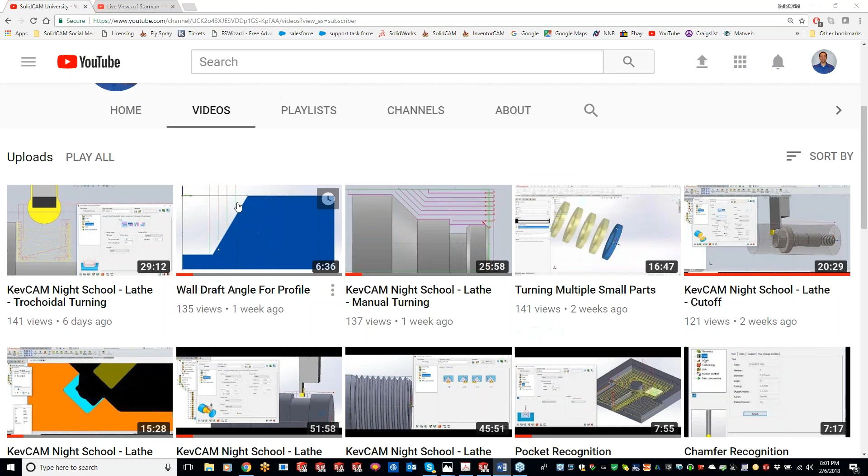So, completely off of SolidCAM subject, but I think we all kind of enjoy this kind of stuff - did anybody watch the live launch today for SpaceX?

I sure did. So Tim, how far are you from Kennedy Space Center? We're actually about, I think, 8 miles from the visitor center, but from the launch pad it's 15 miles from the house to the launch pad. Okay, and so we actually have Tim, Jennifer, Deneen, Sean - am I missing anybody in Florida? I think that's everybody that's in Florida. I think that's all of us. I think that's it, yep.

So Tim snagged this picture of the rocket going up. For those of you who don't know what I'm talking about, SpaceX did the largest payload launch, and they actually sent up Elon Musk's personal Tesla Roadster car. That was pretty cool. You can actually stream it, and this is what it looks like - the Tesla car going around the Earth. Pretty cool stuff.

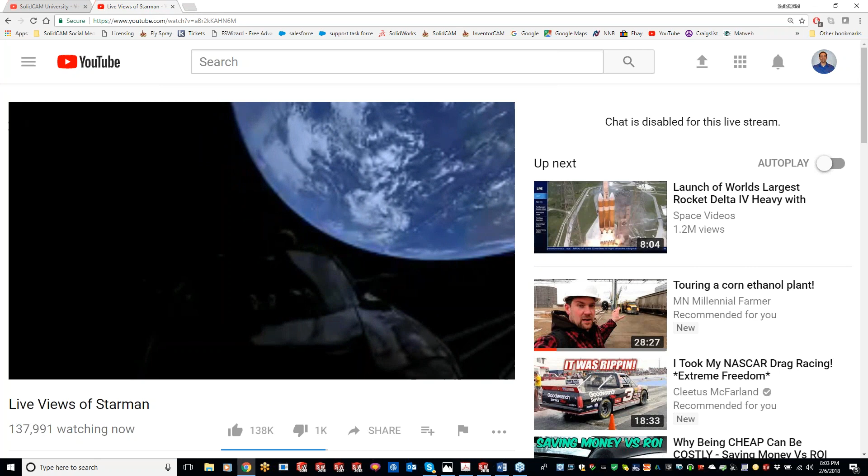George says, 'What a waste of a car!' But we were thinking, worst case scenario, if the rocket blew up, Tim Micah would have a new car sitting in his driveway. That's right, that's what I was shooting for. I was like, come on, let that thing blow up and land the car in my backyard. Oh well. Okay, sorry to get off subject, but that was kind of cool to see.

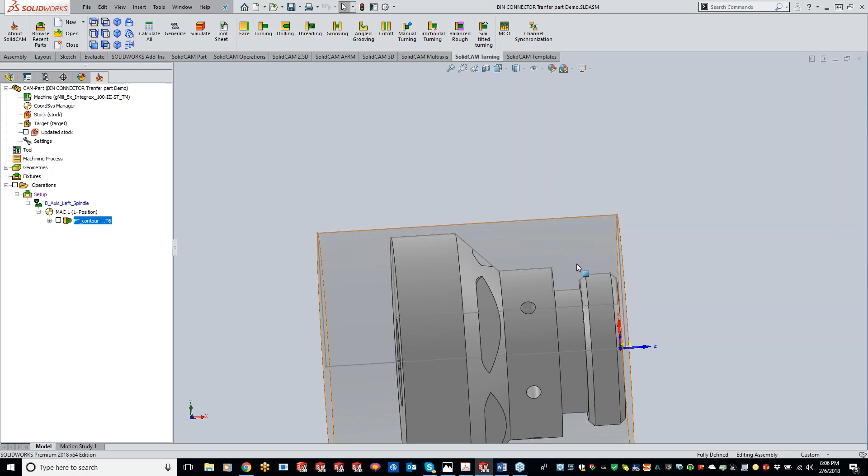So what we're doing is roughing from the upper turret and the lower turret at the exact same time. This is really going to cut down on cycle time for you guys that have a lot of roughing, or just have some extra material to do it on.

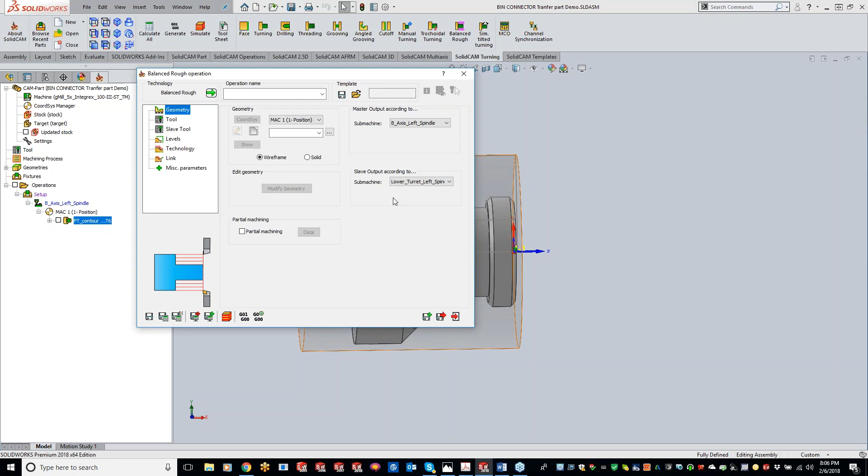So to start the process, it's very, very easy to do. This will be a little bit shorter of a class too, just because they've created this in a very easy way for you guys. So we'll do a balanced rough. Our geometry is the area that we want to cut, just like any other turning operation we've done.

So we'll say new, and I'll come here and start my chain there and end right here. So I'm going to rough out this entire area. Hit the green checkbox.

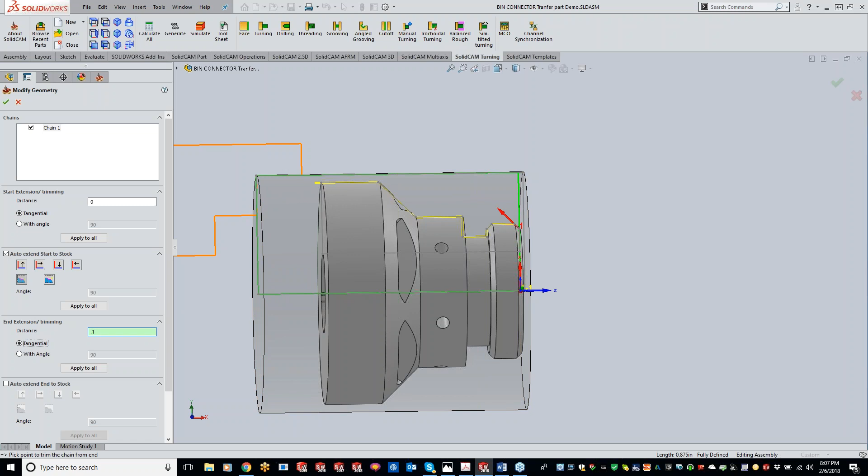Now, if I go to my Modify Geometry, obviously I don't want to do an auto extend to my end because I'm going to come into my vices here, but I'll just add an additional 100 thou in there, just so we go a little bit past. So you can see by adding that 100 thou, it's extended off my geometry line by 100 thou.

Okay, so this is pretty normal from what we're seeing. This over here is something new, not new to the software, but new for you guys that are seeing this. So basically, what turret do you want to be machining?

We have our sub machine right here, which is our master output, and I can come in here and click the drop down and pick what spindle I'm running on. So I've got my left spindle running with my turret and my lower turret running on the left spindle. For this particular machine, we can actually run on the right spindle also, just because this machine is able to do it.

So you've got your sub machine, or I should say your master, which is going to be your top, and you have your slave, which is going to be the bottom trailing behind it. A lot of times you won't even have to mess with this, because a lot of machines just have your upper turret and your lower turret, and that's the only turret you really have to worry about. But if you guys do have a sub spindle over on the right hand side, this is where you would go to change it.

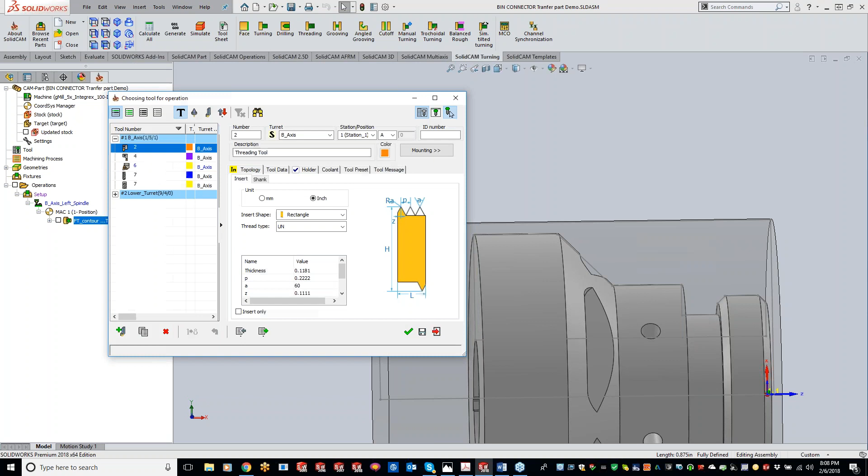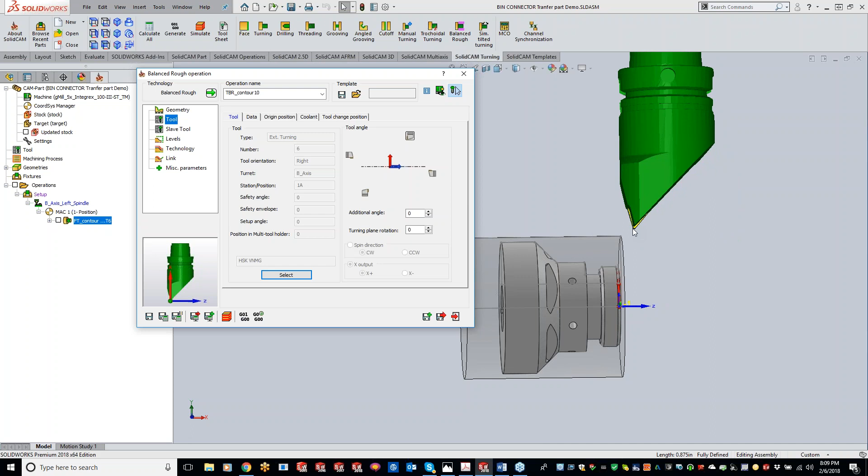Okay, so with your tool, what tool do you want to use for your main up on top? I am going to use my tool number 6. Hit the green checkbox and just rotate it around right here. Like I said, this is an Integrex machine, so this is actually mounted up on another spindle, and I'll show you guys what it kind of looks like in the machine sim. So we've got this mounted up in the spindle, just like picking any ordinary tool.

Now your slave tool, which is following behind, I'm going to grab my tool number 1 right here. Now here it gets just a hair tricky, because technically I'm oriented the wrong way - this tool should be flipped down here. But since we're doing the balance turning, you don't have to take that guesswork out of how it's going to look down there. It's going to rotate that tool automatically for you, flipping it to go the right direction for the bottom half. So don't worry about changing the mounting around - just get it so if you were to visualize machining with the upper turret. Hopefully that makes sense.

Levels, same as normal.

We'll just leave everything as default. Now, technology—how do we want to rough it?

Going forward, if we go to the roughing strategy to edge breaks, that's what you guys are normally going to see. The only added piece here is the balance mode. So we can do the upper turret and the lower turret cutting at the exact same time, or I can do a trailing, where the slave tool follows the main tool—for this instance it's 1 inch, but we could just do a 1/4 inch trailing behind. So it's totally up to you guys how you want to do this, but you do have the option to do it simultaneous.

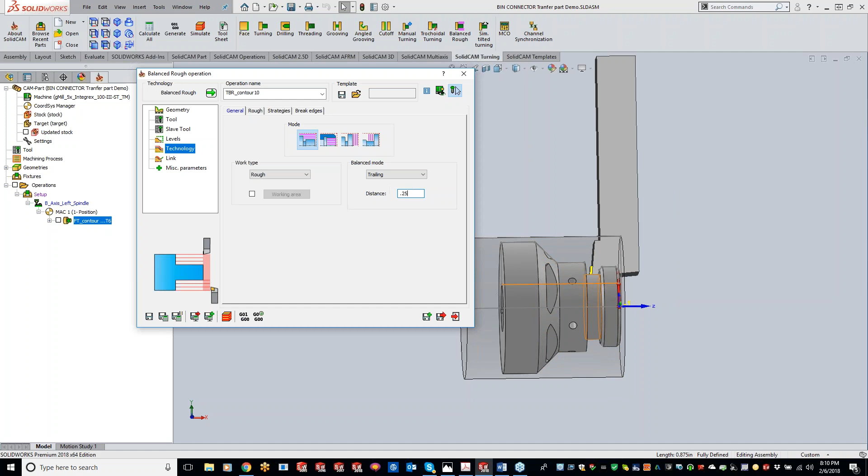So it's doing the upper and lower at the same time, at the same cut. Let's do save and calculate, and I'll show you what I mean, because when it's doing the balance roughing, they are going at the same time, but one is following just a little bit farther behind. I'm going to go to my strategies here and remove the non-descending motions.

Okay, let's take a peek and see what this looks like first. Let's do turning. So you can see right here, I got my main up here and my slave down here, and my slave is following that 250 thou behind—you can kind of see it's just keeping that constant distance going all the way behind.

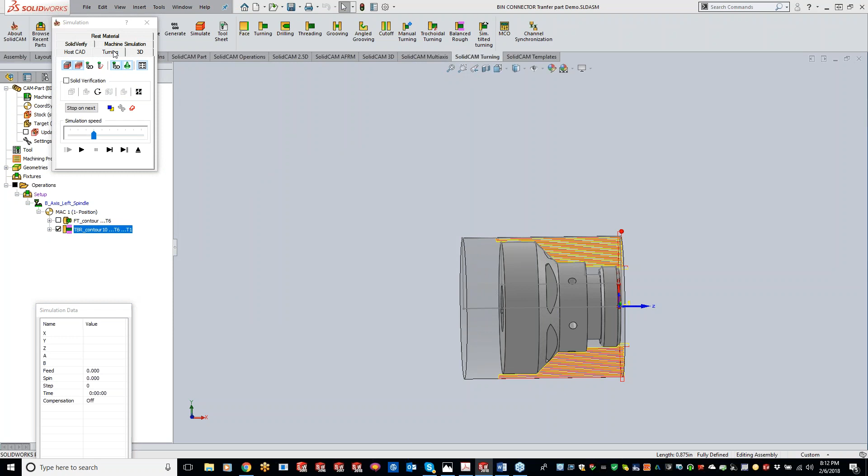Now, if we switch that over in my general tab here to simultaneous, they're going at the exact same rate. So that top one is still cutting deeper than the bottom one, but they're doing it at the exact same time. This one is just a little tougher to see because they're going exactly together. But it's definitely up to you guys on how you want to do it—if you want to do it at the exact same time.

But for simulation purposes, it's a lot easier to see if I do a trailing. Save and calculate—we can see better what's going on here. If you guys think of balance roughing as identical to turning, I'll show you an example of that, but there's not much complexity going on right now. The only difference is we're using that lower turret and cutting at the same time as that upper turret.

I know when we start working with balanced, using that upper turret and lower turret at the exact same time, it seems like it's going to be tough to program. It's not—they've simplified this and made it real easy. So think of this as just a standard turning operation, just with the added lower turret for you guys to do the trailing.

Under the rough, I don't—Kevin, do you have the options? Go ahead.

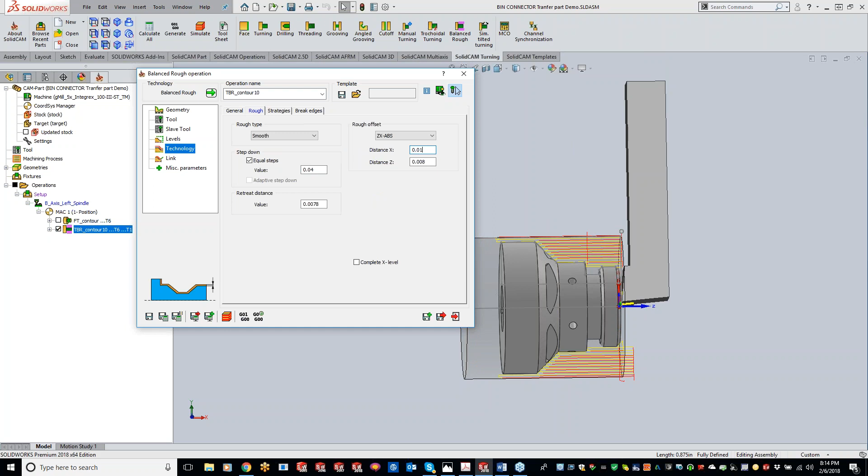So instead of doing, let's say, 10 cuts on your upper turret, this is going to reduce it down to 5 cuts, still taking that same step down of 40 thou that we specified. And we can leave a 10 thou finish on there—maybe I'll just put 8 to match it up here. So it just eliminates that cut time for you guys. Yeah, that's a better explanation than I gave. That's just another way to say it.

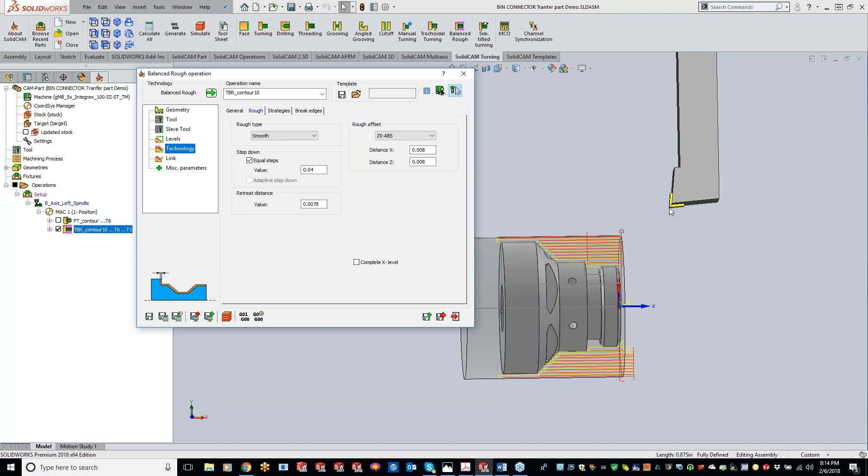We got a question there as far as facing capability. This looks like a longitudinal cut—I'm not saying the right word for the type of cut. Can you do this on facing as well? Yep, if we are doing a facing op, this will work also.

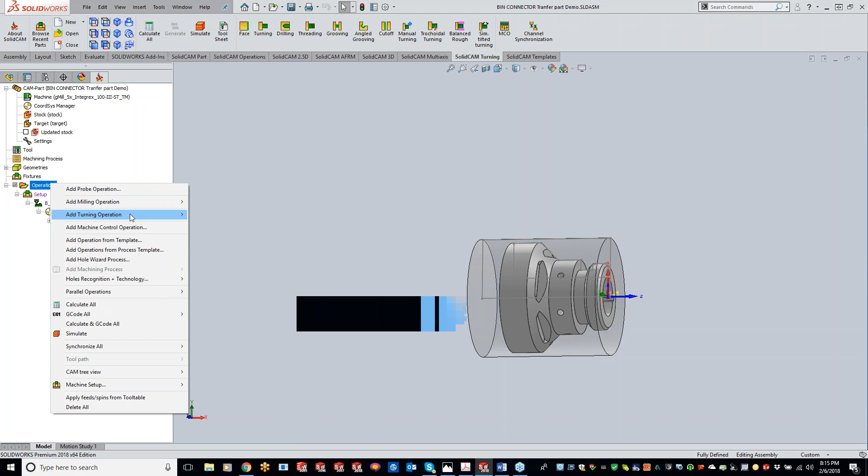Just to make sure I'm not eating my words, because I have done that in the past in class, let me remove that facing op. And we'll do our balanced turning, balance rough. Grab this guy here and do a modify. And we'll do auto extend. For some reason my auto extend is not coming up—let me get back in here, modify.

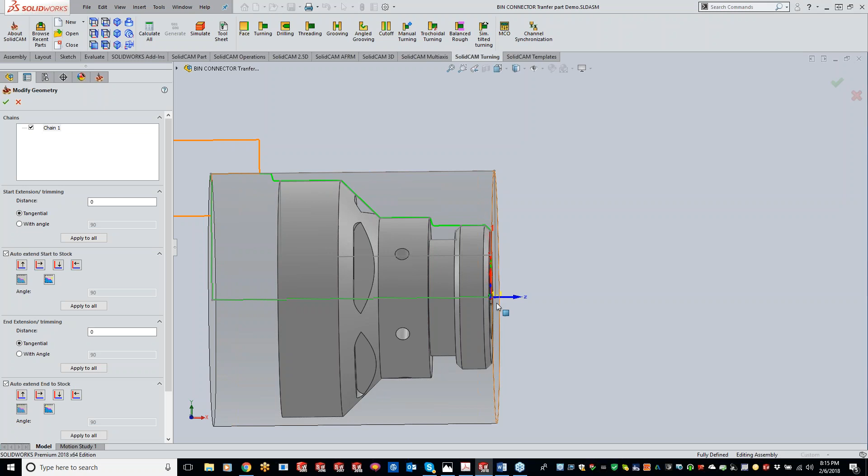Should be, maybe we can't do it on facing. Let me just try forcing it in here. So I'll do an auto extend to that point right there, and I will do a start extension up here.

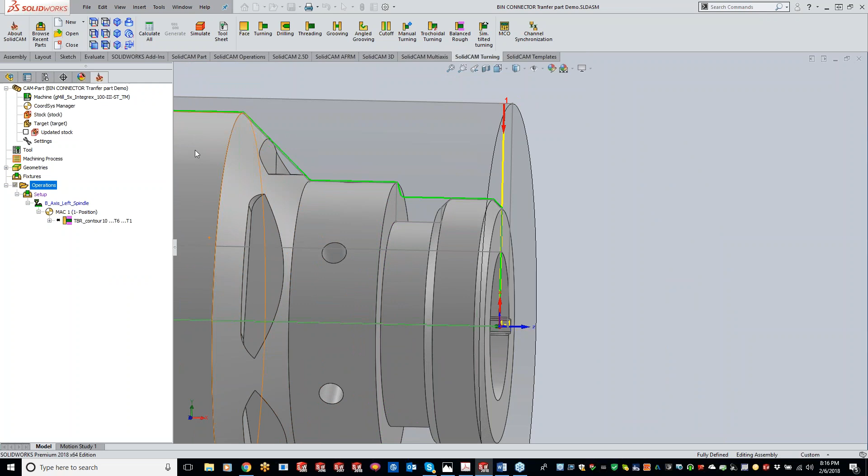Tool. So we'll use our tool number 6 as our main, flip this. Slave is tool number 1 on the lower turret. And let me save this.

I took these out of sync here, so I'm dragging that one down. All right, make sure I grab the right one here. Yep. Okay, now we've got our slave and we will do facing front.

And we will do trailing again of, let's just do 100 thou. Roughing strategy, let's just do some small passes. Not that small, 10 thou, 10 thou. Save and calculate.

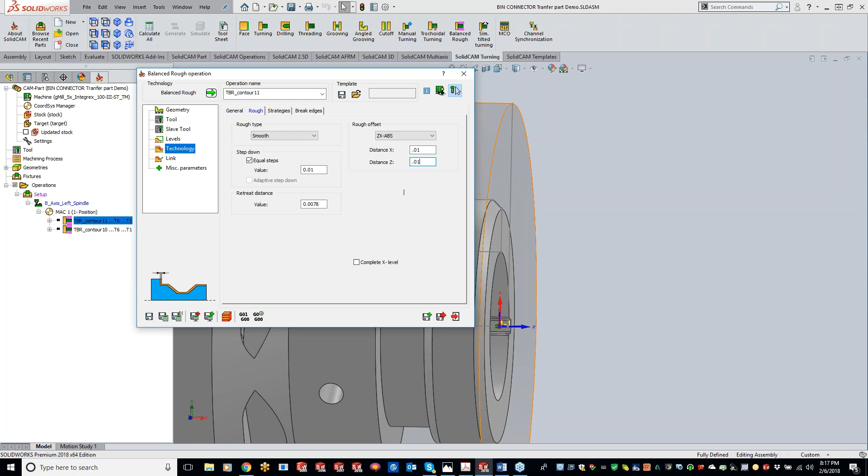I had a question there about tool number 6, whether it has clearance to do facing. It's like tool 6 might crash on you. Yeah, I don't have my tools oriented the right way. But to answer your question, was it Greg? No, Ben. To answer your question, yes. I don't have the clearances shown right there.

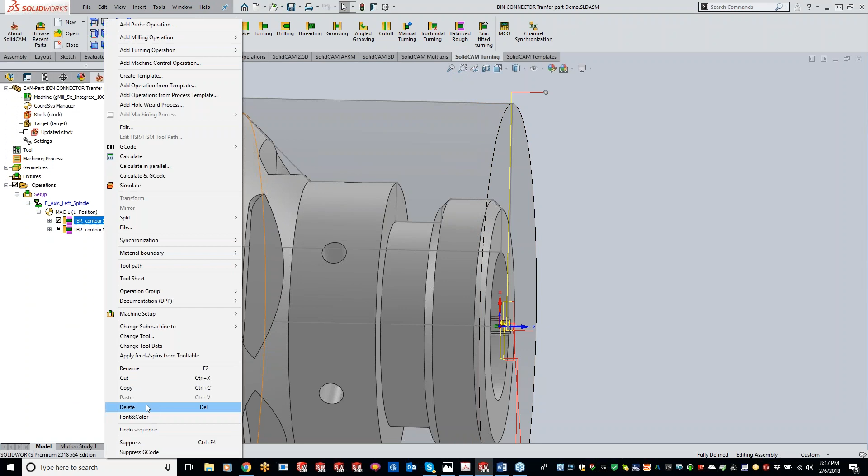Going back, Kevin, to Ben's question, wondering about balanced roughing for having the upper tool do the ID versus the OD, one tool running one and the other running the other, or does that have to be a separate operation? Okay, so that would be a separate operation.

So let's say that upper tool is doing a roughing and finishing up here, and the bottom turret is doing an internal bore right here. You guys can have that happen at the exact same time, and that's going to be part of your channel synchronization. I'm not going to go too much in detail here because this gets a little bit different per post processor.

Each post is set up just a little bit different on the channel synchronization. And what happens in the channel synchronization is I can have many different ops, and I'll show this once we get into some of the mill turn, but we can get going, you know, upper turret and lower turret, and we click the channel synchronization here.

What it's going to do is look at your program and tell you what tools can go along with each other. So you guys can actually be doing all this work up here and down here at the same time using the channel synchronization feature. It's going to tell you if it can be done, where it can be and where it can't be, and why.

Sometimes clearance. So if I'm doing a groove down here and I'm outside machining out here, we're going to be running into some additional stock down here depending on where this grooving is starting off for us.

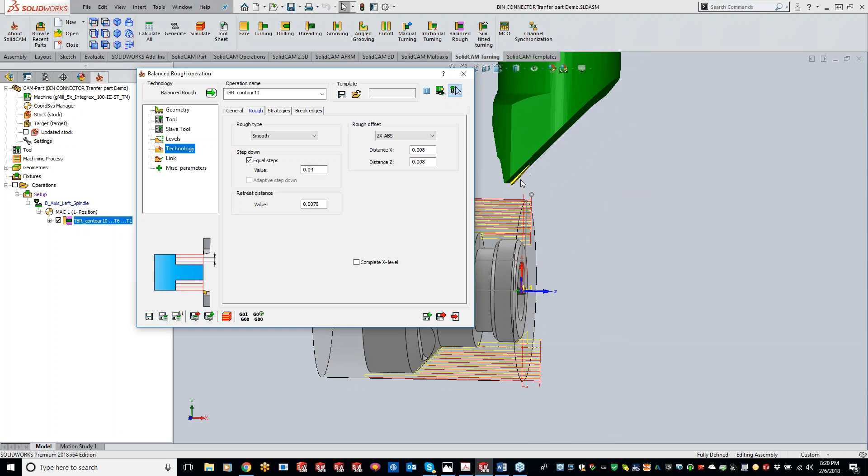It's really cool technology, and I'm kind of amazed, the more technology comes out, the more stuff we're able to do, just because we have to keep up with the machine vendors doing these machines. If you would have looked at this machine 10 years ago, I'd be like no way, that's not even possible. But as the machine vendors come out with new features, the CAM software is automatically adapting to that for you guys.

And Ben, I think that answers your question. As long as the machine's capable of doing it, for sure. Absolutely. Yep, so definitely can do that for you guys, and the sky's the limit. I'll kind of show, when we get into the mill turn basics and advanced mill turn, really how powerful the software is.

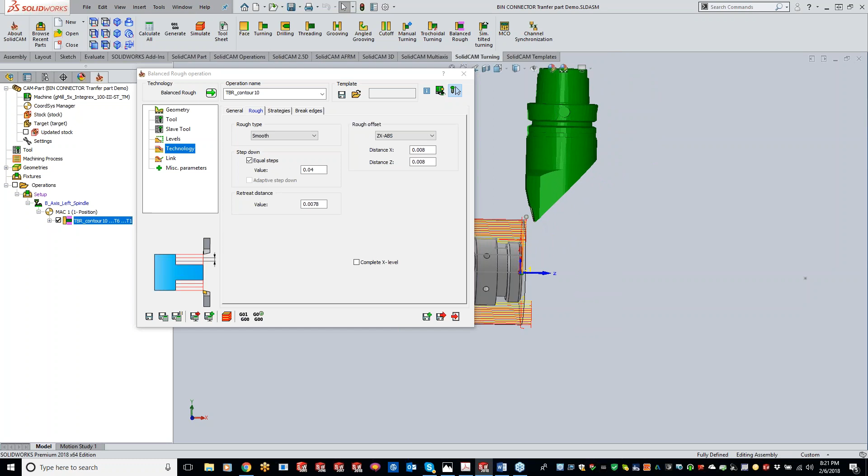Okay, any questions on the balance? Let me go through one other thing here. I don't see anything else. So the balanced roughing, hence the name roughing, we still have that 8 thou on here to come back with a finish tool. Well, they've made things quite easy for us.

So what we can do is we can just do a save and copy.

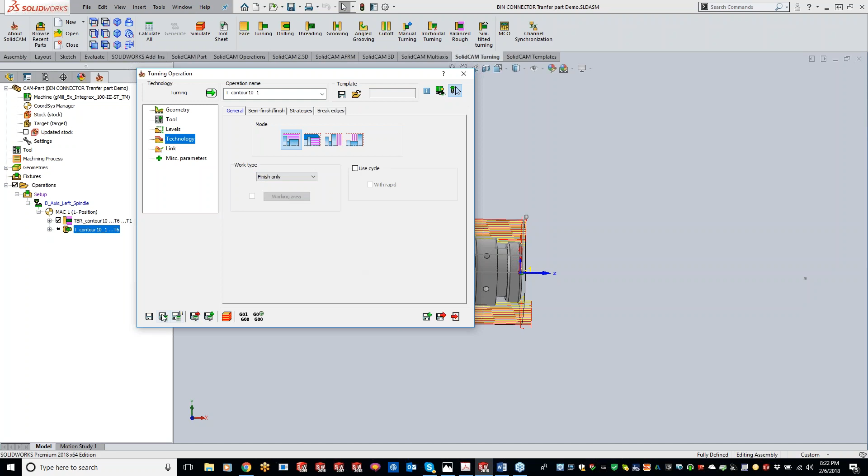And now the only thing I have to do is hit this little arrow right here. By clicking that, it's automatically going to convert it into just a turning operation for us, but I still have all my parameters. So the only thing I really need to do in here is go to general and tell it to do a finishing only, save and calculate.

Now I've done a finish pass, cleaning up what I had left over. So if we do a simulate here, turning, you can see going through there. So let's play these both together.

And some of you might be saying, well, why isn't the holder showing up? That is an STL holder that's only going to show up for you guys in SolidVerify, Host CAD, and MachineSim. So on the turning one, the STL holder will not show up, it'll just be the insert for you.

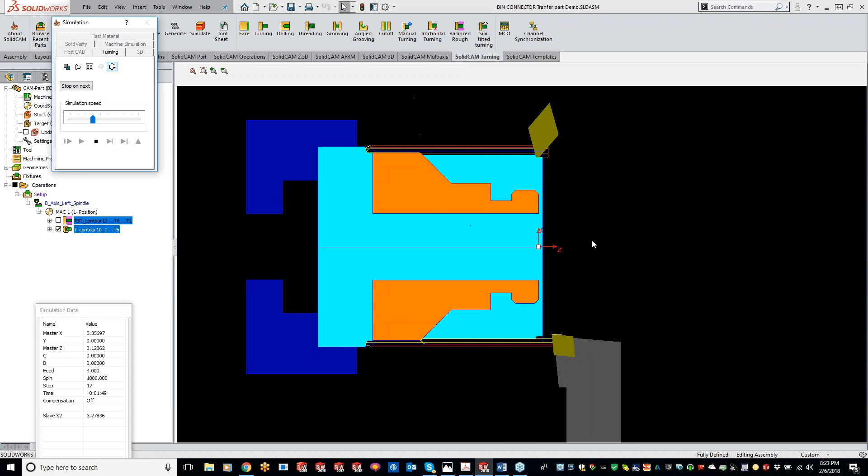So let me hit the play button here. It's just so beautiful, isn't it? All right, now it's going to do the finish pass, and we're done.

So let's take a peek and see what it looks like in MachineSim for you guys, to get a little bit better view of it. Now this MachineSim is a little bit large, so it does take a second to pull up for you guys.

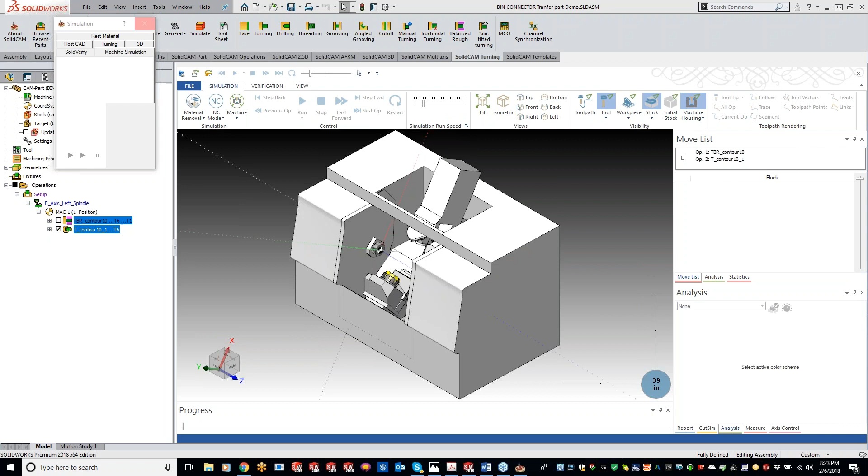Ronnie, you missed our good conversation about the SpaceX. Yeah, right, I seen Ronnie came in there a little late. Yeah, I'd like to give Ronnie good grief.

Okay, so we got our MachineSim, like I said, on an Integrex here. And let's go ahead and play this through here. So you can kind of see that upper turret and lower turret cooking away here.

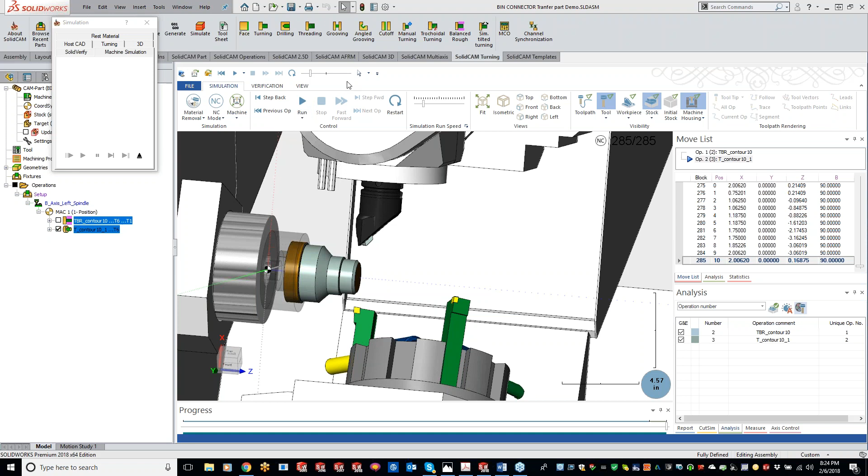And it does its finish pass, and we're done. So really nice, like I said, really easy to use. There's not much to it, just like the rest of the turning stuff. So it really makes things really simplified in there for you guys. We try to make it as easy as possible.

As you guys are doing this, if you see something, let us know if you'd like to see something else in there to make it easier. When we're looking at this and development is looking at this on a day-to-day basis, getting that outsider's view of 'God, why didn't you guys add that in there?' There's a lot of times we don't see that. So if you guys do come across something, let us know.

And then with this balanced roughing too, I kind of forgot to mention this - we can do the outside, we can do internal facing, or even back facing. So you can do this with your grooving tools. So the sky's the limit on what you guys can do there, as long as you have that lower turret.

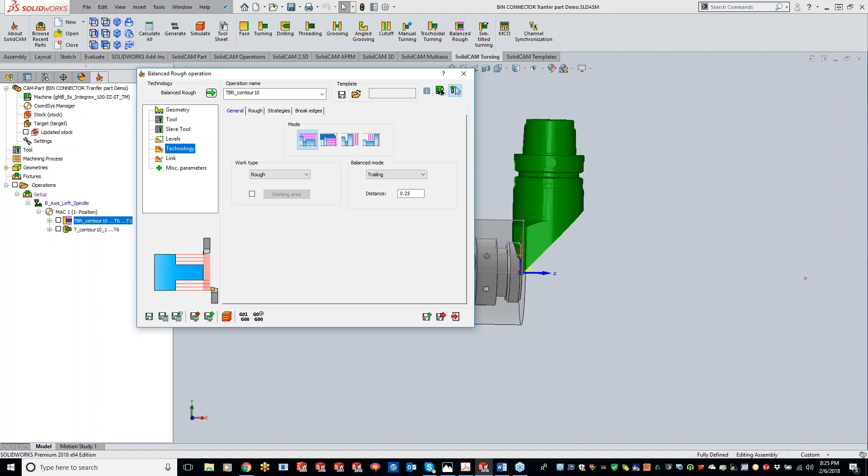And Kevin, we got a couple questions there from Ben about finishing two different ODs, after the different tools, different turrets. So with doing a finish pass, it's the same way.

Let's just say we're coming in here and we did this finish pass right here. We still have that groove. What you do now is you'd come in here with your grooving tool, create that groove to groove out this material. But then what we do is we do our channel synchronization, kind of like I was talking before, and then we'd be able to run both of those at the same time.

Like I said, I want to get this one - I'm going to kind of cover more of this when we get into the mill turn side of things. But like I said, you create two operations right here, and hopefully that's kind of what you're asking, Ben. And that way you can come in here and do the groove on this lower turret, and the finishing up on this upper turret.

Okay, Kevin, just jumping back for a second there - I think it was Greg had a question about using cutter comp.

Cutter comp for the balanced roughing is not there just because it's a roughing operation. If we go to the roughing type, we don't have our compensation, the cutter comp options.

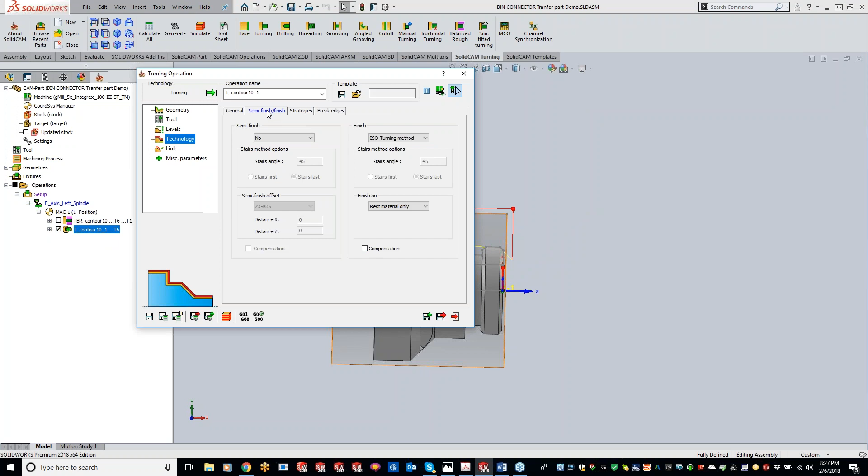But in the finishing op, when we converted it, we do have cutter comp available for us, and that's only because the semi-finish tab is now highlighted for us. So it's just like turning - if I go back to this one, if I just do rough only, the same screen that you're seeing here is the balanced roughing over here for you guys. So just no compensation there.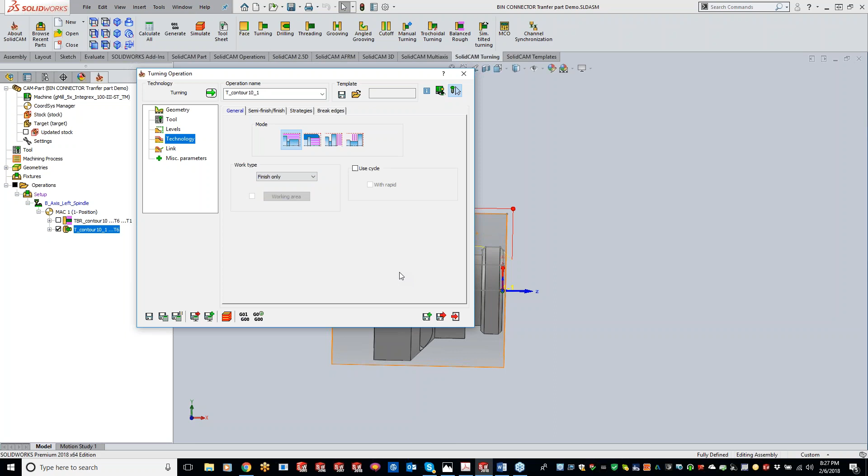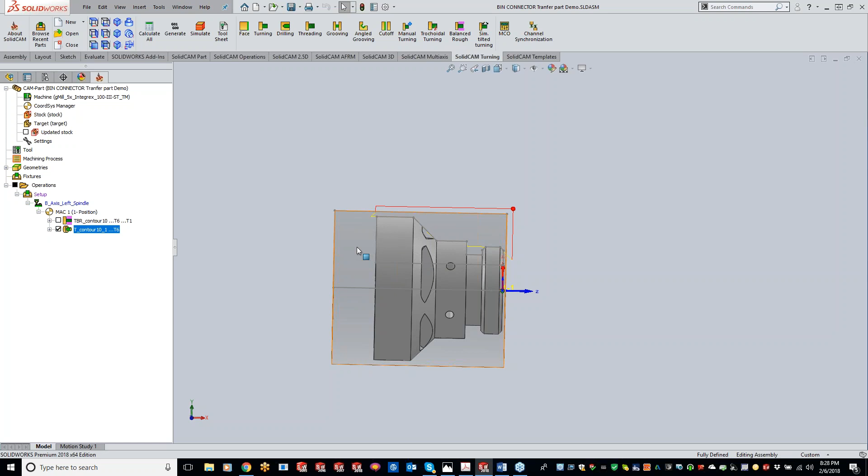So what I'm going to do when we get over to mill turn is, I don't know how to go about this in the best way for you guys, since there's no different sections of mill turn. So I'm going to start off with some simple parts in one class, and keep it basic. If I throw all of mill turn in, it's going to be a 6-hour long class for you guys. So I'll start with some basic parts, do some basic programming, and keep moving our levels up into the mill turn. So when you guys go to the site, I'll go there right now.

Okay, hey, you guys are the boss. You tell me what you like and don't like. Tim likes to boss me around, but on this stuff he's got no say. It's all you guys.